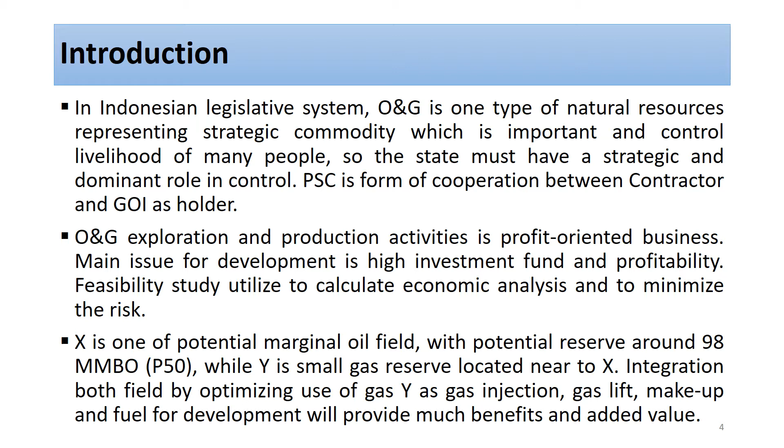X is one potential marginal oil field with potential reserve around 98 MMBO P50, while Y is a small gas reservoir located near X. Integration of both fields by optimizing use of gas from Y as gas injection, gas lift, make-up, and fuel for development will provide much benefit and added value.

Problem statement: oil field X is categorized as marginal field, only able to provide thin net profit, therefore not profitable to develop, but it might turn commercial if there is any improvement. We say marginal due to moderate reserve located remote offshore, waxy fluid that needs processing, and complex facility.

Objectives: first is to obtain integrated alternative configuration for development; second, to obtain optimum cash flow from the alternative selected; and third is to implement risk management to minimize the risk and its effect.

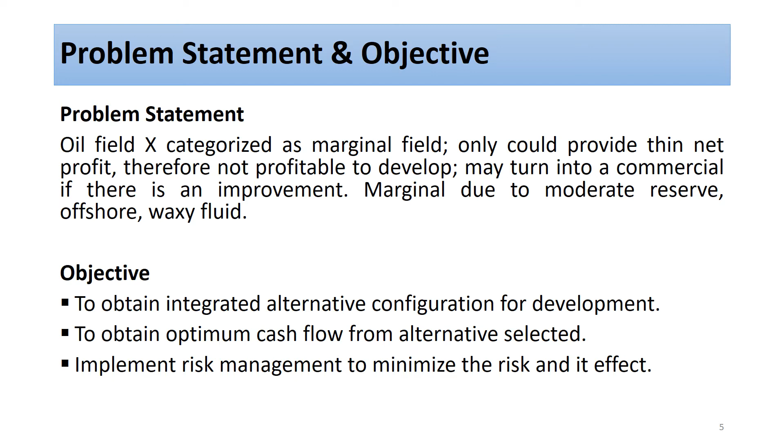Methodology is the sequence of steps that will be carried out for development. We have 5 steps here. First is determine concept, second is set of configuration, third is technical study, fourth is economic study, and the fifth is optimization.

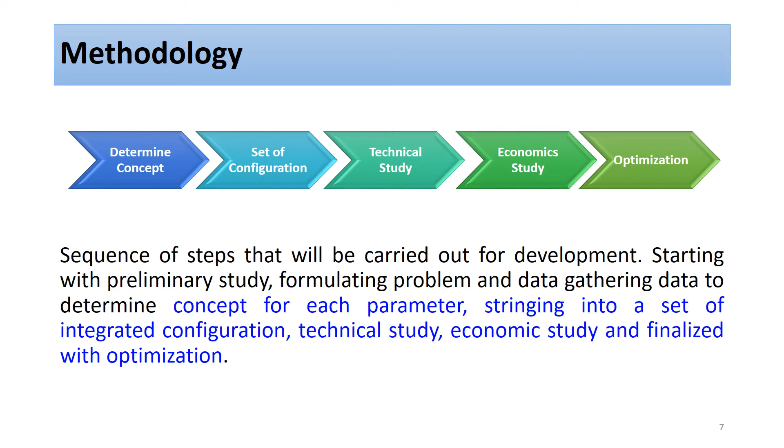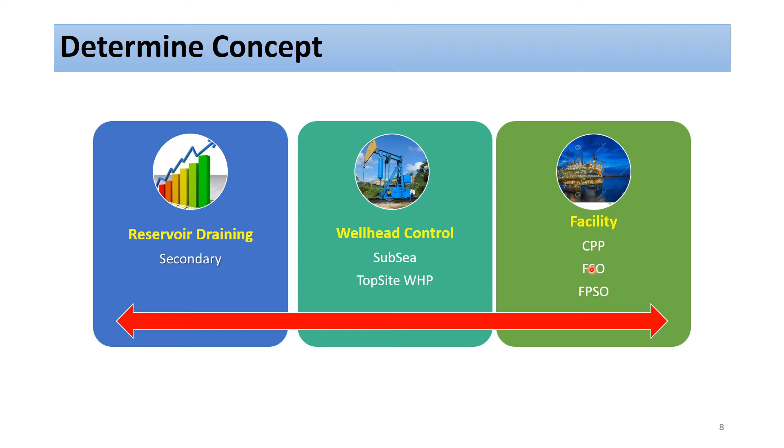Determine concept. We have 3 basic concepts here. First is reservoir draining—at this session we select only the secondary. Second is wellhead control; we have 2 options, subsea and topside. And the last is facility for processing, production, storage, and offloading, consisting of 3 options: CPP, FSO, and FPSO.

Set of integration configuration. Standalone here means we're still using diesel as a basis. We have 5 options of configuration that come from the reservoir, wellhead, and facility combination.

First option is secondary, subsea, and Lease FPSO. Second option is secondary, subsea, CPP, and Lease FSO. Third option is secondary, topside, and Lease FPSO. Fourth option is secondary, topside, CPP, and Lease FSO. And the last option is secondary, topside, and ownership FPSO.

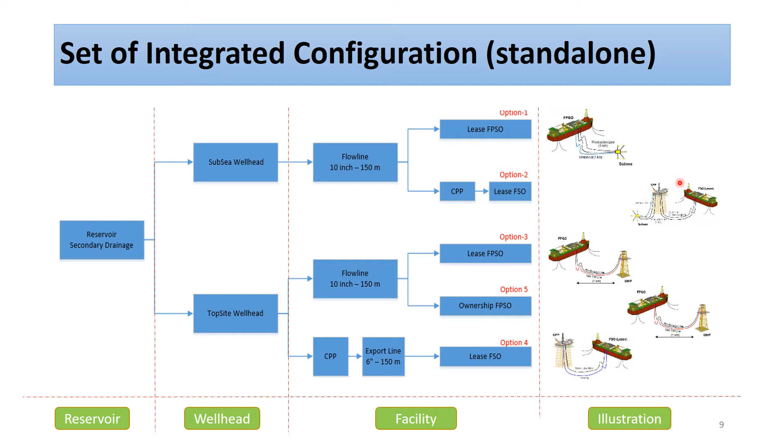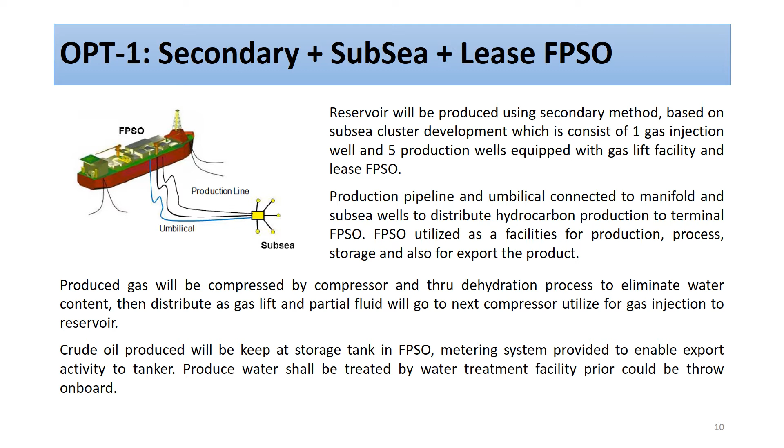You can see the illustration here. Here are the details for every option. For your reference, this is option 1, option 2, option 3, option 4, and the last option is option 5. Now we go to results.

Production profile optimization. Waxy oil has a characteristic fairly heavy density. Without advanced technology, the well will not last long. To be able to extend the well life and maintain a constant production rate, downhole pressure must be maintained.

For that reason, we supply a compressor for gas lift and gas injection. We see in the green graph here, production at 10,000 barrels of oil per day will continue for about 1.5 years. After that, it will decline up to end of life.

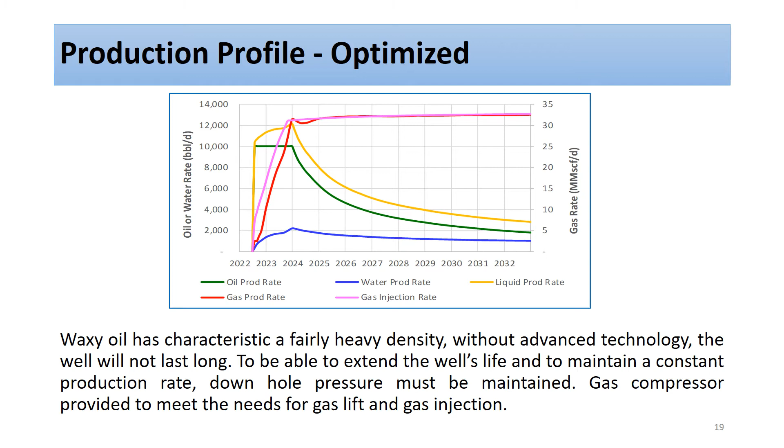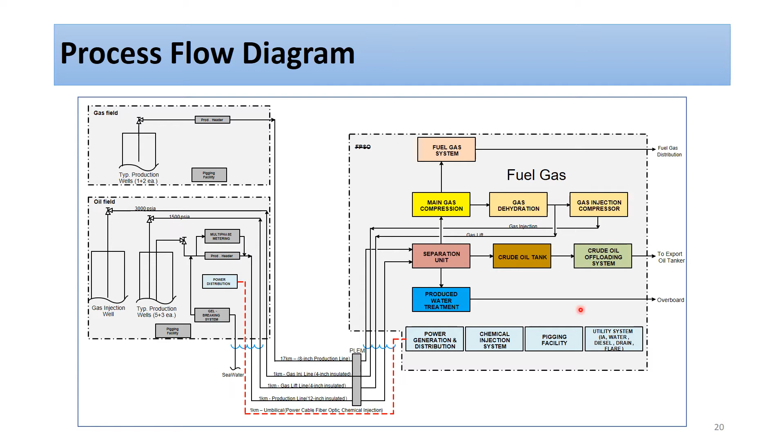Topside wellhead control has high flexibility for operation, requiring lower investment and operating costs. Surface facility design is based on fit-for-purpose philosophy adopted. HAZOPS analysis is applied to examine process and design engineering related to potential failure of function and their consequences. Assessment is based on existing protection and severity based on final consequences, with a priority scale to determine whether an identified hazard has sufficient attention.

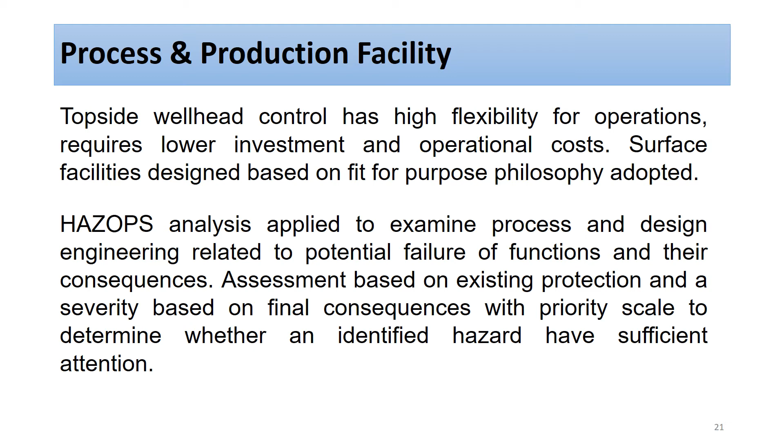Simulation with production rate 10,000 barrel oil per day for 10 years operation will produce gross revenue at total 1,068 mm USD. The use of diesel will be costly. It could consume up to 140 mm for fuel and additional 2 mm to provide nitrogen bottle required for gas lift and gas injection.

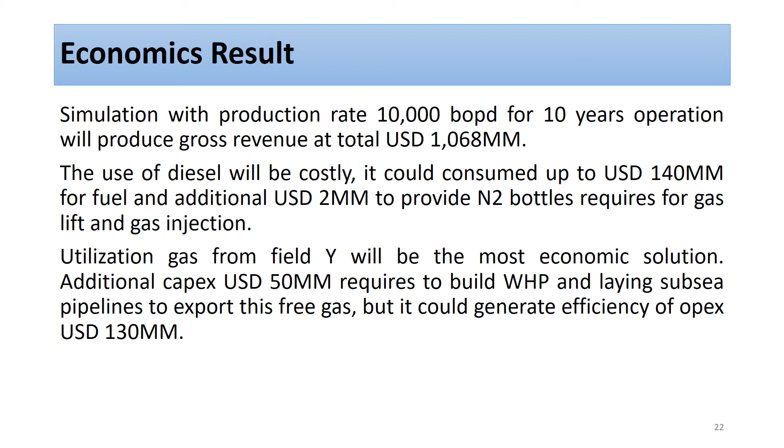Utilization of gas from the field will be the most economic solution. Additional capex of 50 mm is required to build wellhead platform and lay subsea pipelines, but it could generate efficiency of OPEX of 130 mm. You can see here the economic indicator based on PSC cost recovery.

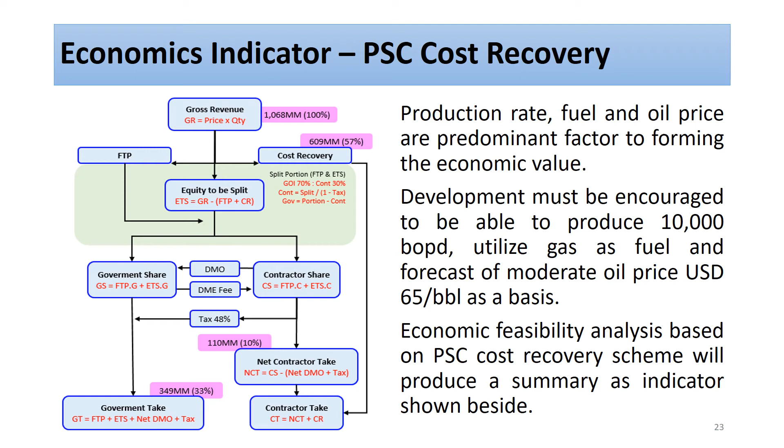Production rate, fuel, and oil price are predominant factors forming the economic value. So the development must be engineered to produce 10,000 barrel oil per day, utilize gas as fuel, and forecast a moderate oil price at 65 USD per barrel oil as a basis.

Economic indicator based on calculation of 5 options. We can see here option 3 will provide the most attractive financial benefit. Government take at about 33%, contractor take 10%, IRR 12.8, and POT for 4.5 years.

IRR higher than MARR means profitable. Total investment could come back within 4.5 years and generate positive cash flow onward up to end of the life.

Sensitivity of IRR: we see here the basic parameter we use with plus minus 20% variance. CAPEX, blue graph, small CAPEX will generate bigger IRR. CAPEX is a high contributor to IRR. Maximum addition is 15%, which will generate a threshold where IRR is equal to MARR or 10%.

OPEX, green color: small OPEX generates big IRR. OPEX only can give a small contribution to IRR.

And the yellow graph is oil price. Cheaper oil price will generate small IRR. Oil price is a high contributor to IRR. Maximum decrease is about 12%, which will generate a threshold where the IRR is equal to MARR or 10%.

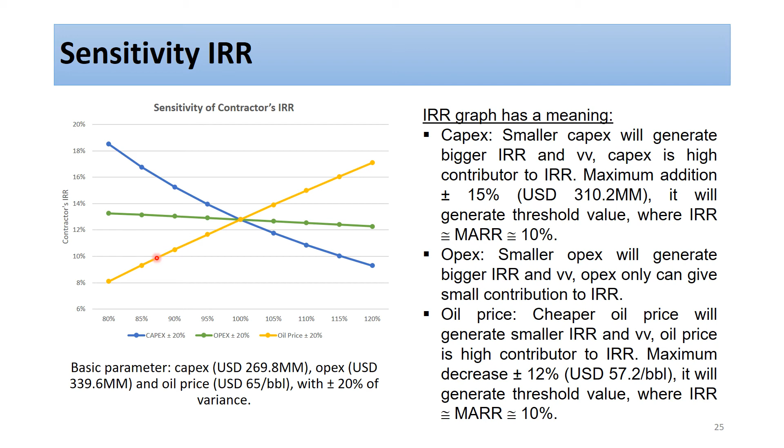Sensitivity of net present value with basic parameters same as IRR. From the graph, we have CAPEX, the blue color: small CAPEX will generate big NPV. CAPEX is a high contributor to NPV. Maximum addition is 15%, which will generate NPV at MARR or 0.

Green is for OPEX. Small OPEX will generate bigger NPV. OPEX only can give a small contribution to NPV.

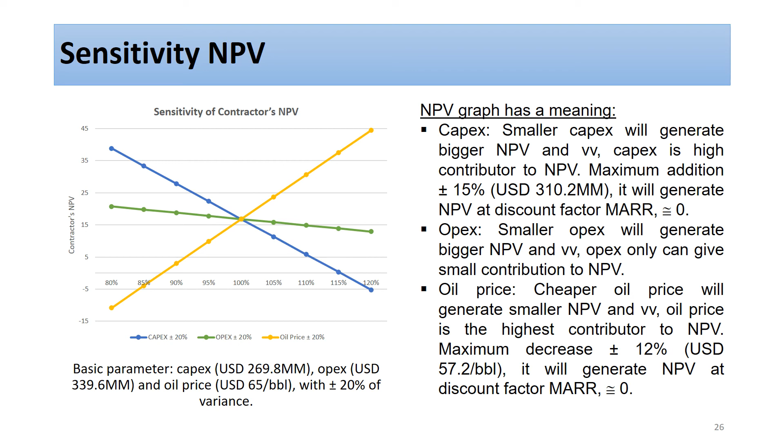And the yellow graph is for oil price. Cheaper oil price will generate small NPV. Oil price is a high contributor to NPV. Maximal decrease is about 12%, which will generate NPV at discount factor or MARR equal to 0.

Share portion of the revenue: Option 3 will be the most attractive financial benefit for contractor and government. Cost recovery at about 609 mm or 57%. Government take 349 mm or 33%, and contractor take 110 mm or 10%. Detail you can see here on the graph.

Take profile graph. Red and pink is the yearly annual revenue, while dark blue and light blue is accumulated revenue. We can see here that after 4 years, the contractor will get a positive revenue until end of the life.

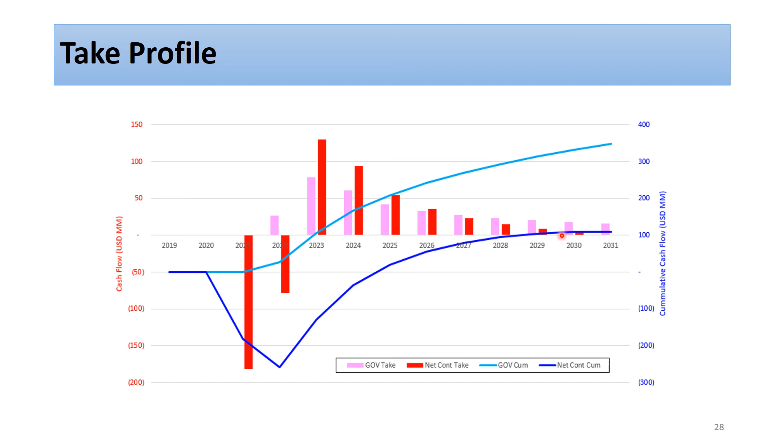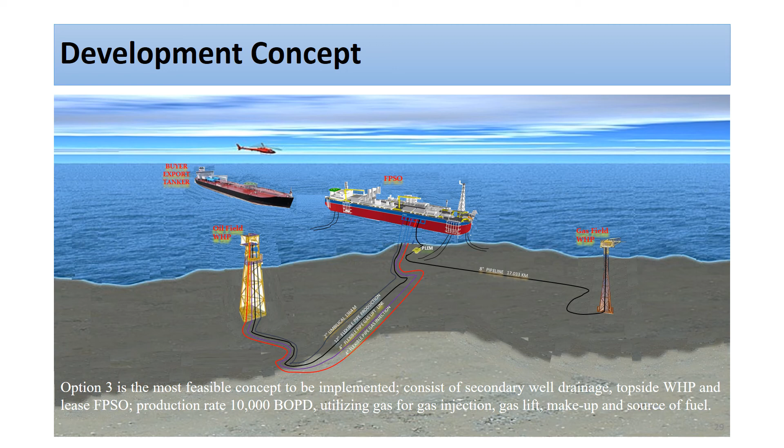For all concepts we have explained before, the development concept will be option 3, which consists of secondary well drainage, topside wellhead platform, and lease FPSO. Production rate at 10,000 barrels per day, utilizing gas for gas injection, gas lift, makeup, and source of fuel.

Now we go to conclusion. Development of marginal waxy oil shale requires a gradual step to overhaul an existing conventional standard by adopting a new fit-for-purpose philosophy. Implementation of philosophy, technical study, and risk management are very important to select an option of each parameter to be used to assemble as a set of integrated solution.

Economic study is utilized to get a big picture of the economic indicator as a basic lead to select an option which is embedded with standard technical performance, optimum cash flow, and could give the most attractive business value. Risk management through HAZOP is effective to identify any possibilities of failure, its severity, and to select additional control required.

So the most optimal solution to develop offshore marginal waxy oil shale X is option 3, integrated with gas field Y.